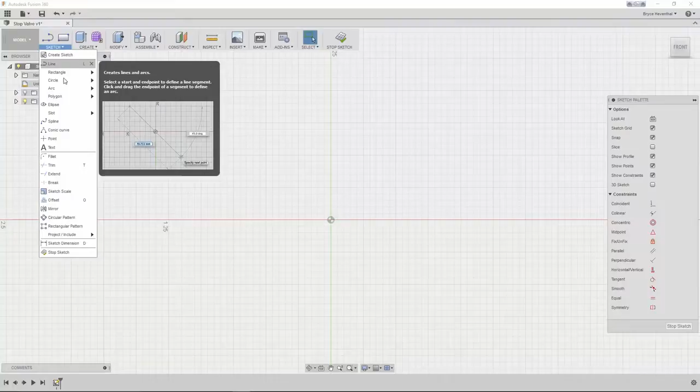Let's take a look. In this update, one of the first things you will notice is the color of the background when using the sketch grid. Previously, when entering a sketch, the sketch grid would display with a gray gradient, which made it look super foggy. Now we have cleaned up the grayness of the sketch grid while sketching.

In addition, we have added the ability to measure sketch arcs. Now you will be presented with the length, radius, and diameter while using the measure tool in the sketch environment.

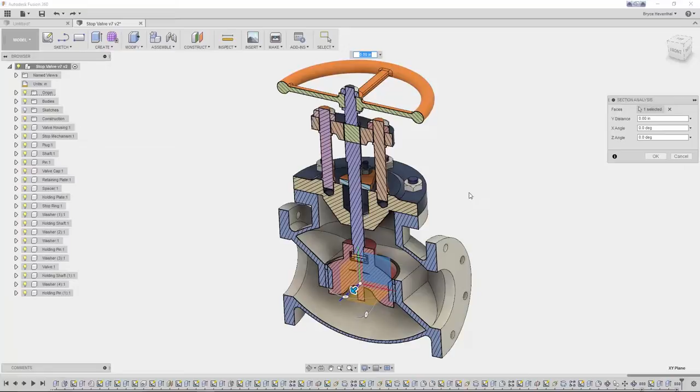Next, when I have a lot of components and I do a section view of the assembly, I will get a different color for the section cap color for each individual component. This will help visualize touching or intersecting components when creating a section view analysis.

Next, let's move on and create a tangent construction plane. Previously, I got an angle to alter the tangent plane, but I didn't know what the angle was referring to. In this update, we can select a reference plane or face and input an angle off the reference to drive our tangent plane.

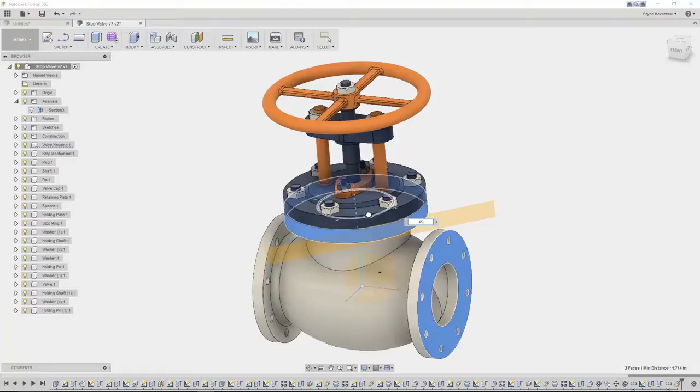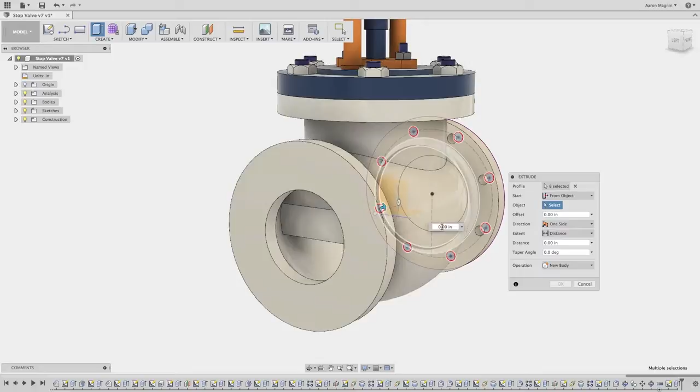This next enhancement is one of my favorites in this Fusion 360 update. Now we can apply offsets to the start or end conditions for an extrude. For example, I have a sketch on the face, which I would like to use to extrude holes on the opposite flange. I can change the start condition to From Object, and then select the face. Now I can key in the distance to drive the hole pattern cut through the flange.

Not only does this work on flat faces, but the extrude will offset on curved faces as well. In this next example, I want to extrude this part number so it contours to the curved face. I can start by starting this extrude.

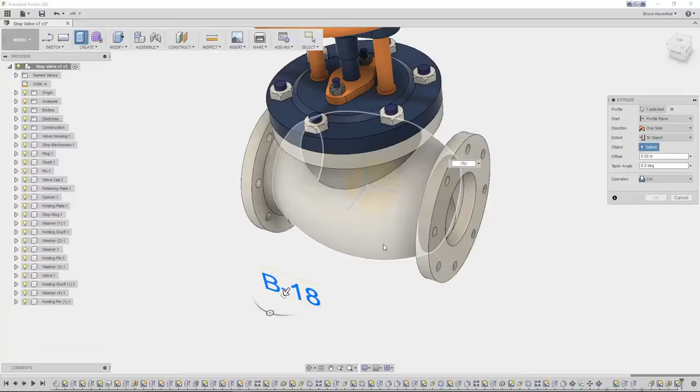Rather than changing the start condition, we can change the extent condition to Object. Now we can select the curved face. Notice by default it is going to join with a 0 in the offset. Let's change the offset so the extrude runs into the housing. Now the operation will automatically change to cut and follow the contour of the curved face.

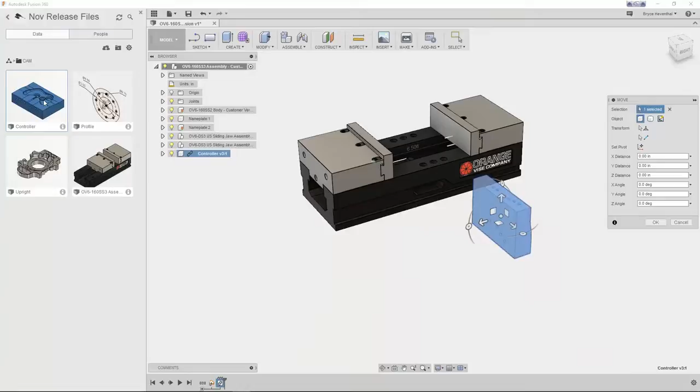Now this next enhancement will help everyone who has to use assemblies. In this update, we have added the ability to apply XY offsets. Previously, when creating a joint, the Z offset was the only direction we could change.

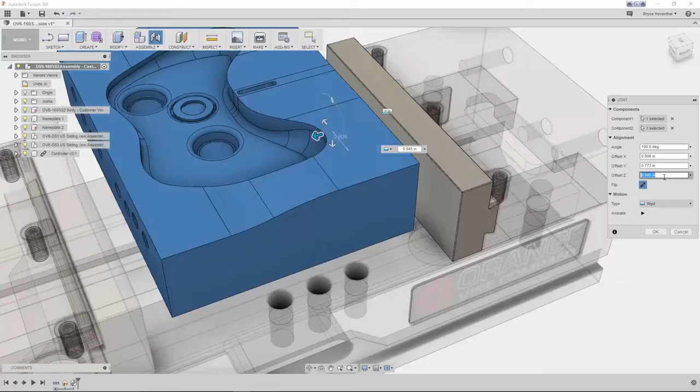Now in Fusion 360, we get a triad to move the part in all three directions. In this case, I want the part to sit down in the vise by half an inch. So I can zero out the X and Y offset and use the Z offset to move the part down in the vise.

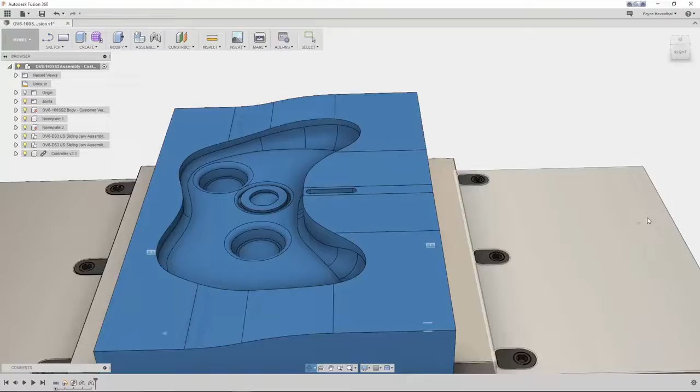I would also like to move the sliding jaw to the part. So let's create one more joint. Notice I use the same value for the Y offset. Once I hit OK, Fusion 360 will solve both joints and sit the part tightly half an inch down in the vise.

That was a great demonstration of some awesome new capabilities. Thanks, Bryce. What was your favorite?

Man, those XY offsets to all the joints. I showed you only at rigid joints, but you actually could do the XY offsets for any type of joint, whether that be revolute, cylindrical, slider, all of them. Good stuff, man. Well, let's see what's next.

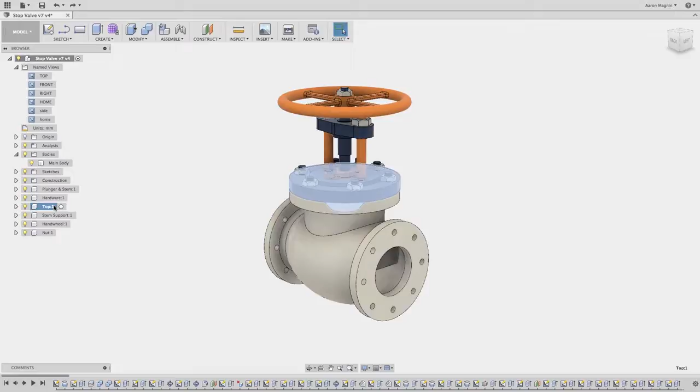A great way to interrogate assemblies is to adjust the visibility of geometry, either by hiding or changing the opacity. And while Fusion has had the ability to see through components for some time, the ability to adjust body opacity is new to the October update. This would help considerably in this case, as the main body of this valve is just that, a body.

Another way to visualize components is with component color cycling, one of my top 5 keyboard shortcuts in a recent quick tip. But a lot of users found they were toggling it on accidentally, so going forward we've changed this shortcut to Shift-N.

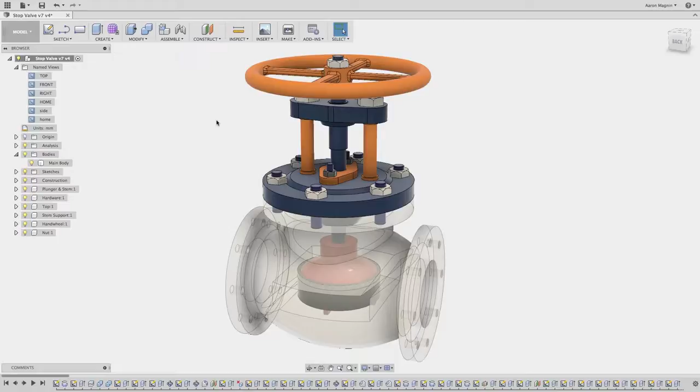Speaking of changing, let's change gears and turn our attention to the simulation workspace. Here you'll find some of the most significant advancements of this release. Hitting Solve will bring this to the forefront, and immediately you're met with a new interface, and the reason for this is simple but powerful.

Cloud Solve. We talked about this in the Fusion Forecast, a must-read for all Fusion users. But let's reiterate why this is so huge.

For starters, you'll have the ability to solve multiple studies at one time. Once you send these off, the immeasurable power of the cloud will solve these at rates standalone computers simply cannot. And unloading this burden will encourage you to crank up the quality, test many more instances, and the best part, once it's sent into the cloud, you can continue working on other tasks.

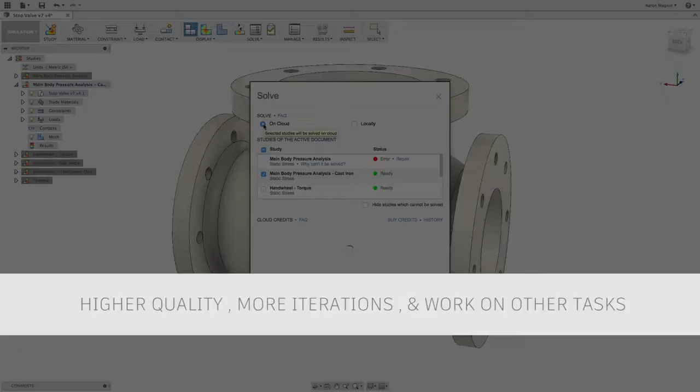Back to where I was, scrolling through the list, I see and select the studies to run, but one of these is telling me it's not ready. Great to know, but also easy to ignore if I want to quickly send all studies that are ready.

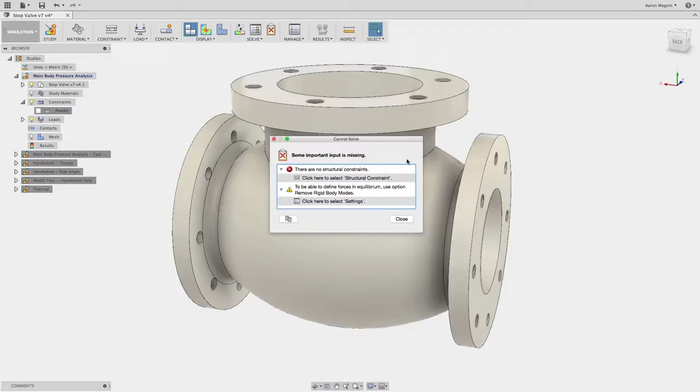However, I want to fix this, so I'll click Repair. In the resulting dialog, I'll get a rundown of what information is missing, and armed with that knowledge, I'll go add the missing constraints. This is made easier because constraints can be accessed with the keyboard shortcut now, C. And just like that, I should be ready to run.

So I'll access the solve options again. The solve options will default to cloud solve, and even though that's the case, it's important to remember that local solves are an option and sometimes more efficient for simple problems.

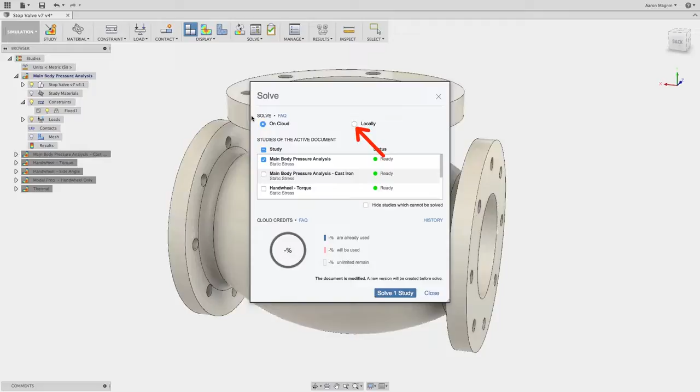Anyway, I can select all the studies by clicking here, or select individually again. Once that's done, I'll get an idea of how many cloud credits this will be. Once I click solve, the problems will begin uploading to the cloud, and I can go work on something else.

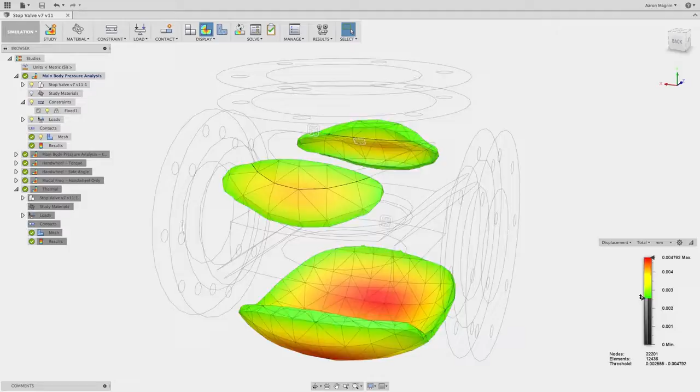As results start to come back, you'll be informed with a notification. But here you can see all the studies have completed, so I'll close this dialog and begin digging into the results. Additional results can be accessed from Fusion Team or within Fusion from the Job Status window.

With all that completed in record time, I can move on to the next part. I'll turn on Model Display with the adjusted Ctrl or Command L option rather than M, which had conflicts with the Mac OS environment. Back in the model, the next thing I'd like to do is make a drawing for the handwheel.

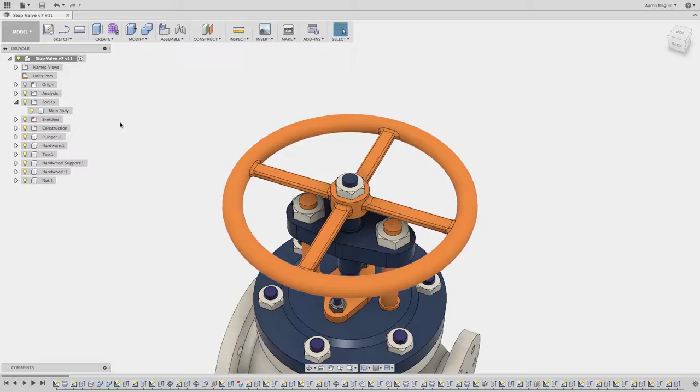To do this, I'll use the intuitive new Drawing Creation option found in the Workspace Switcher, a huge improvement. And finally, I want to adjust this drawing so that the handwheel spokes are vertical and horizontal rather than at this odd angle.

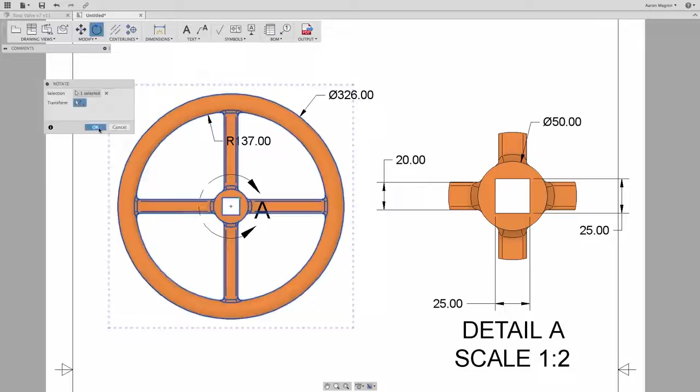I'll use the new Rotate option, which will enable me to make this adjustment easily and will maintain the already assigned dimensions. All I need to do now is reposition a couple of them and I'm good.

Man, that cloud solve is freaking amazing. I can't believe we could leverage the cloud to solve these really long simulations. Yeah, to be able to offload these time-intensive calculations onto someone else's computer, it's freaking awesome. Huge game changer.